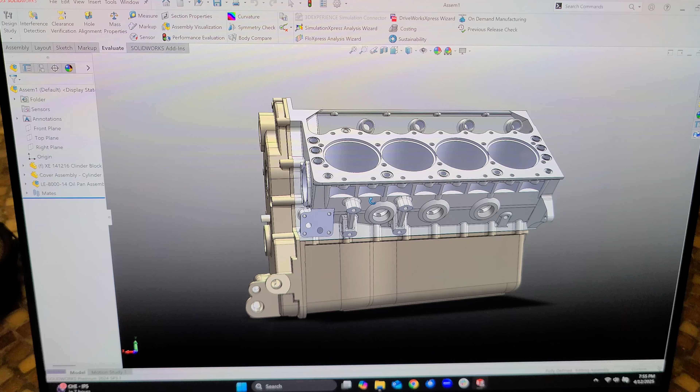Here's the current condition of the Calliope, right? Block as I have it done thus far. Now this is accurate for machining purposes, all the holes, all these angles, faces, and whatnot. There was some mention in Brian Lohnes' video about the copper sealing rings everywhere. I do not have the cylinder liners in here, this is just the block. These are oil drainback passages.

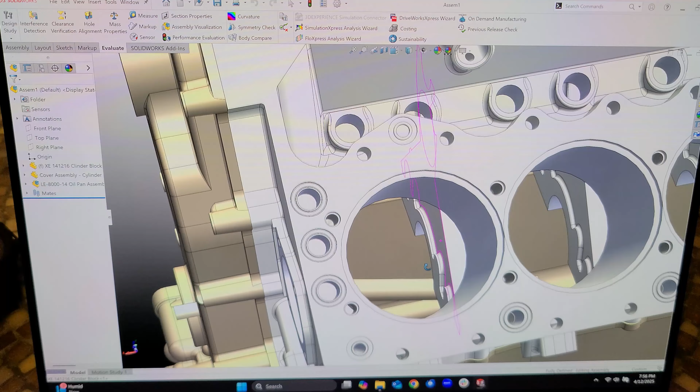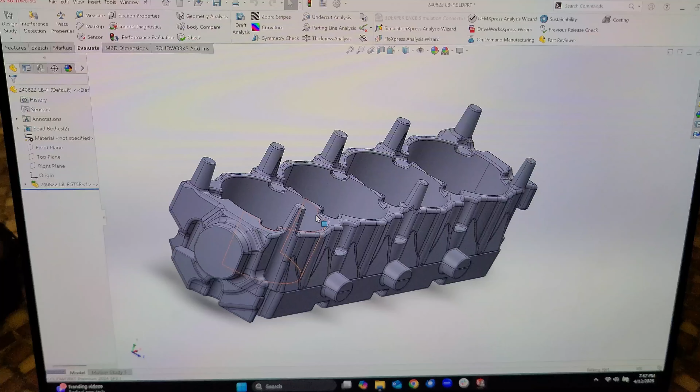Anyways, this is the condition I have the block in right now, and there are no water jackets in here. Now the cool thing is Dan had the water jackets scanned for me, because there really is no good way to draw these things off of the factory Ford drawings. Okay, so here's one of the water jackets right here.

Pretty cool, it's a two-piece deal. This is the core that you would take a sand casting of, and then do the reverse, and then that is essentially this piece, again in sand, and then that would live inside the entire mold, and then this would be broken up, and all the little pieces would come out the freeze plug holes. So that's what that is.

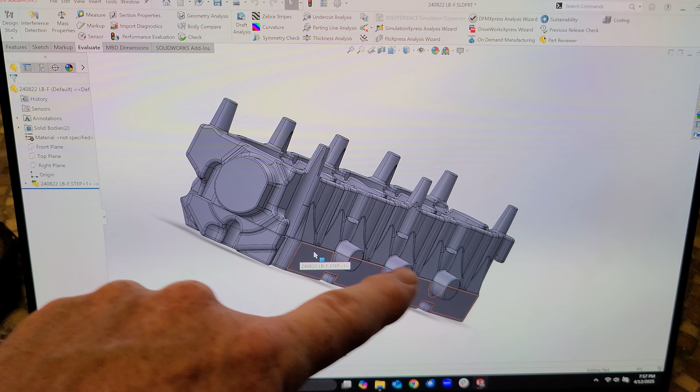This is the outside of the block, freeze plug holes basically. And then this would be an oil passage right here, so this is wall clearance for an oil passage that would feed the lifters. This is the little spud that sticks through and creates the hole for one of the water pumps. This would be the driver's side water jacket core, right?

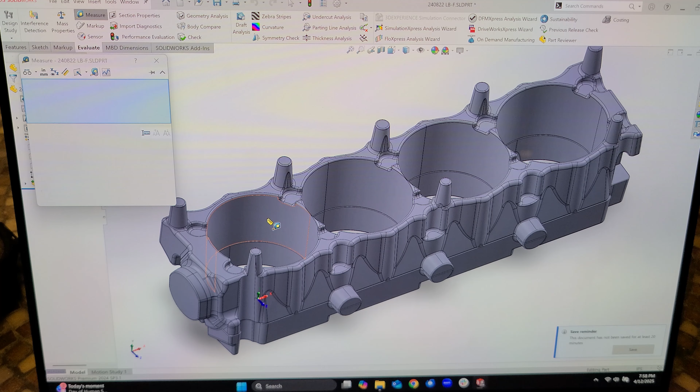Now, if I can do this correctly, let's see. Measure - let's find from the center of that to the center of that bore. Will it do it correctly? Nope, didn't do it correctly. So let's clear the selections, let's do this one more time. Sometimes it likes that line to that line. Nope, kind of pissed off there too.

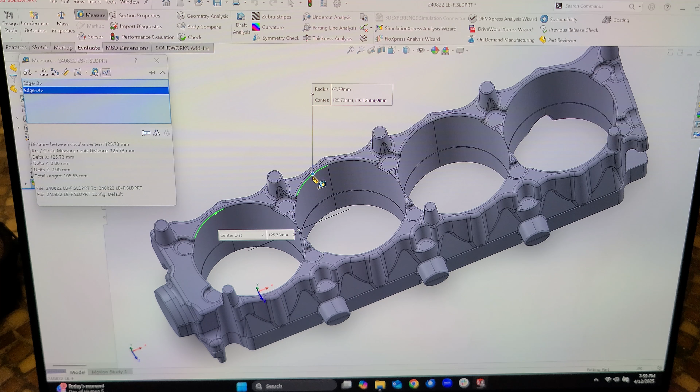Okay, clear selections. Let's try maybe there... to there. There we go. See the black line that shot across there? What is that number? That number is 125.73 millimeters. That's convenient, isn't it?

Let's take that and move that to inches. Okay, and that - we don't want those kind of inches, we want not fractions, but decimals. And let's go 3 places. Okay, go. 4.95 inches from bore center to bore center.

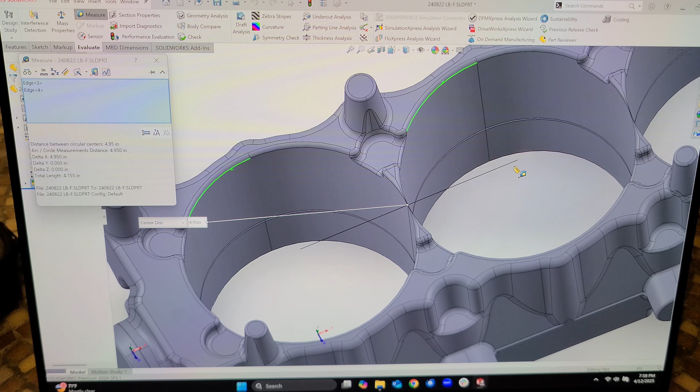Now this is pretty cool when you think about what's going on here. Now, anybody that knows this project and has researched it knows that the Calliope is a 4.9 bore spacing, right? So why is this an accurate scan of the water jacket core? Why is this 4.95 inches? 4.95.

It's got to do with shrinkage. So what I had to do was take these cores and stick them into the block model that I have done already. And my goal was to take these guys and just delete them from the model, right? And when I stuck them in there, I noticed that the bore centers were off.

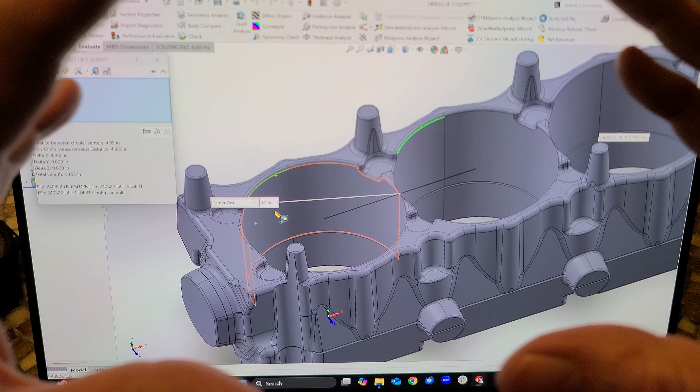If I lined this bore up with the very first bore, and I ran it all the way to the back, it was significantly off, right? 50 thou per hole. So what it is, after conversations with Dan and Dan talking to his guys at the foundry, these things are built with shrinkage predetermined - it's 1.017% bigger in this case, right? Because as this molten aluminum cures, it's going to shrink 5/32 per foot.

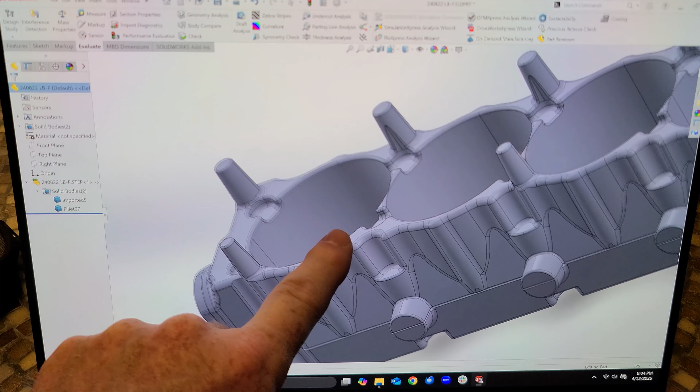So what I did in this case was basically just turn this into a part file instead of a dumb solid body. Basically, this was an imported step file, so I had to turn it into a SolidWorks part file, and then I scaled it 1.017% smaller. And then if we check from bore center to bore center - this is a touchscreen, awesome little computer - it is exactly 4.9. And this was all done when they had these little slide rulers for shrinkage percentage, I think it was described to me. Perhaps somebody can clue us all in on exactly what those little tools are, but that's the way I understood it, and that's where that's all at.

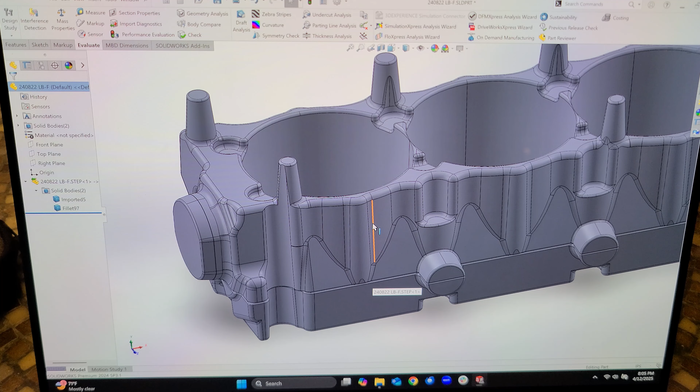Now, this surface out here is very different than what I drew, and this is not very well defined in the drawings. I think what happens is the engineers and the mold makers, the pattern makers - it's kind of like a lost art, right? And there was a standard, the way these things were done.

Of course, there's a bolt hole that goes through here, so they had to leave material for that. But everything else is kind of sculpted away to keep this thing lightweight.

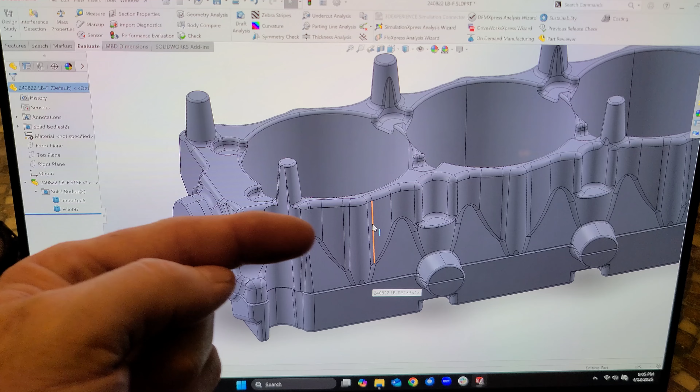It's indicated on the drawings that the wall thickness of all these surfaces is 200 thou. So what I have to do, what I'm working on, is building 200 thou out from all of these surfaces so that I can get all of these little angular surfaces in the side of the block. Is it necessary? Probably not, but I would like to make a nice model.

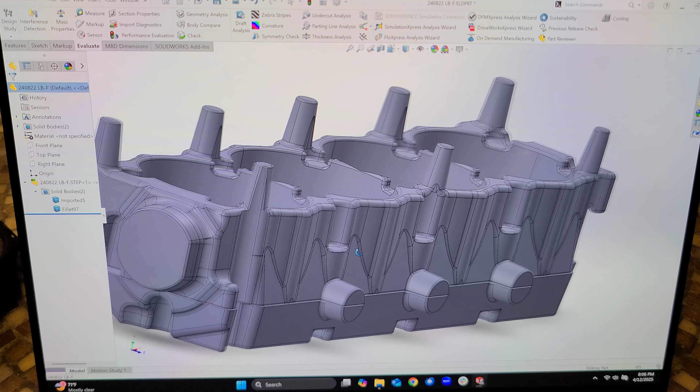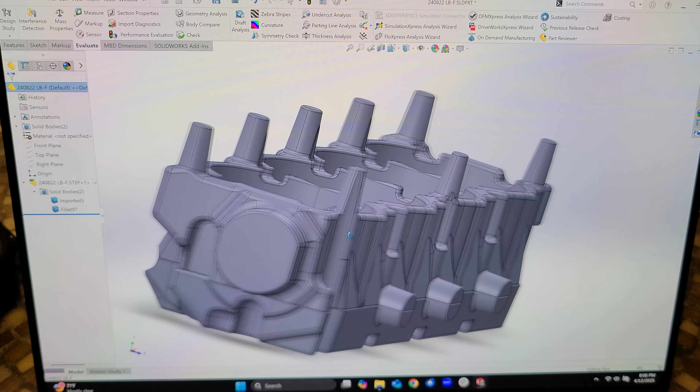You can see where this goes up, and then there's an angle in, and then we have all these little details in here, and this is going to project out 200 thou on the finished part. So I'm going to redraw the whole block starting from these guys, 200 thou out, and then basically project everything up, deck surfaces, and all the areas where we have bolt holes and whatnot. So we're going to start with these and redo the block. But right now we've got a block that we can machine off of, create modern drawings and whatnot. So anyways, that's where we're at with those guys.

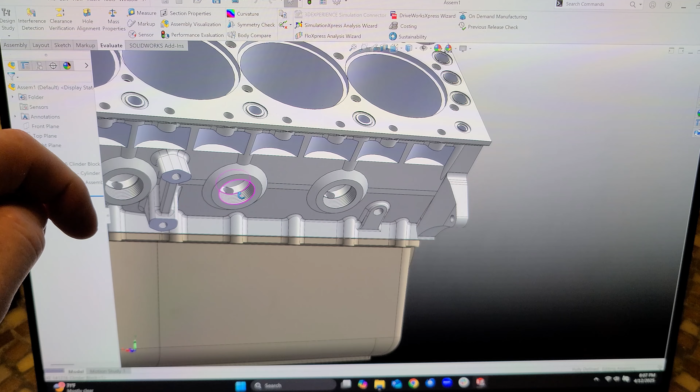I'll give you a look again so you see what I'm talking about. I drew the basics in here, but this still needs a lot of detail in these surfaces out here. Everything else is correct, very close anyways. See this angle right here? This also would have the same angle, but it would be cut away by the machining process for these outer head bolts. So that's not quite perfect, but it's damn close.

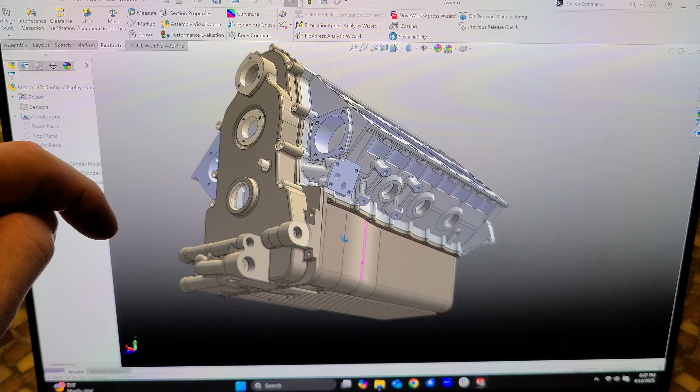And you'll see that I have the oil pan on here, which is finned, super cool. It's not finished yet. We're going to tackle that in another video. What I do have is this.

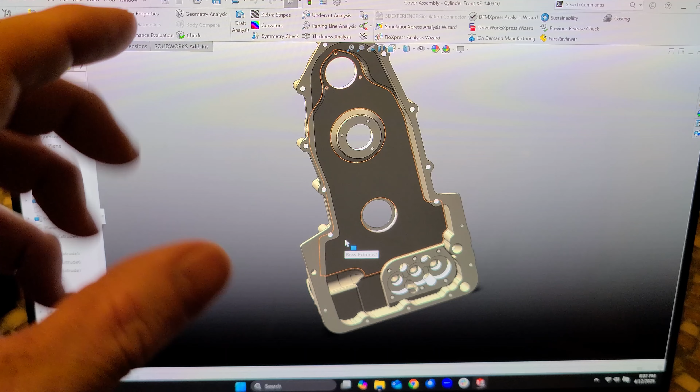It looks like, like I said, Dan hasn't given me all the drawings, so I haven't been able to put this all together and figure out how it exactly works. But it looks to me like there's a chain and a sprocket that runs the center gear of this oil pump assembly up front here. And it's driven off the crank, which is the next big hole up, right? Crank is way up there.

And this is a scavenge pump. There's also a standard oil pump like we would know in a big block Ford or an FE. There's also an oil pump like that. So how it works exactly, I'm not sure. I haven't gone through all the ports and the holes and whatnot to kind of reason my way through this and figure it all out. But that's the gist of it.

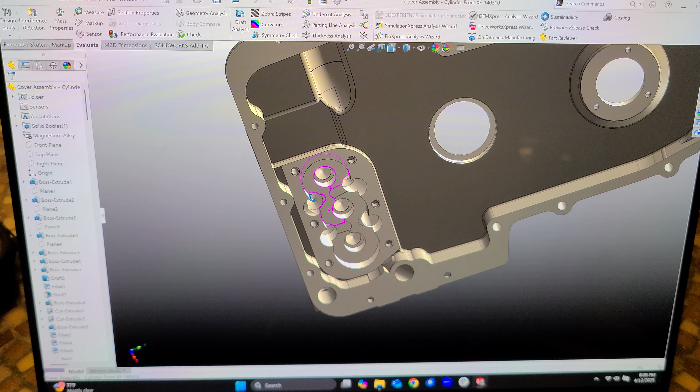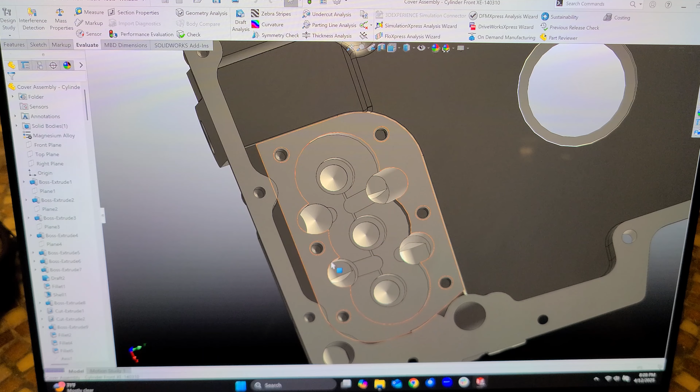So right here, we're back to the model. We've got accurate little bores here. I don't know what goes in there. Again, I don't have the entire model, but whether there's a bushing or bearing, these are going to be gerotor oil pump gears, and we're going to suck and pump oil through these 4 passages, and then the front of the cover.

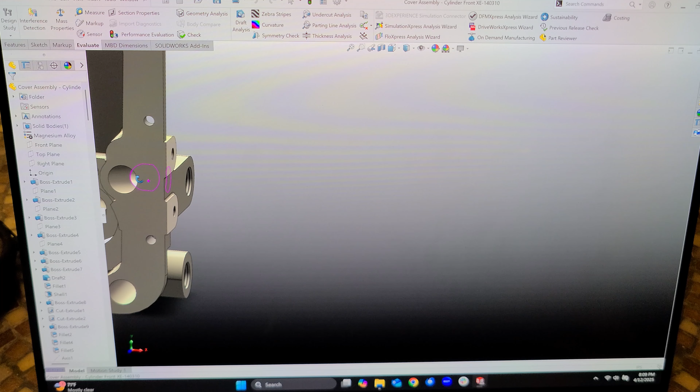We've got some threaded NPT holes for either pushing out or pulling in, whatever it's doing, this scavenge pump system. Not sure what bolts on over here. There's a hole down right through there that runs into the oil pan. So you got 2 pickup tubes in the oil pan, and we'll cover that in another video.

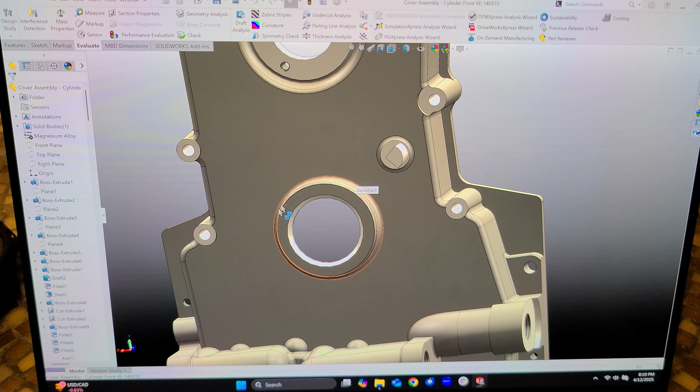But yeah, this is where we're at. Pretty darn cool. This knob up here, yep, you got it right. Harmonic balancer would go up here, and this is your timing pointer. Kind of bizarre, huh?

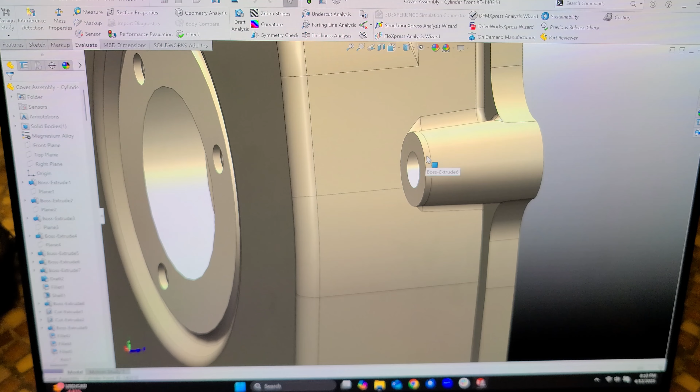Some of these are recessed, machined in, recessed. Some of them are kind of proud, like this. This is how the drawings show it. And then some are quite low, like this. You've got your 2 camshafts up here.

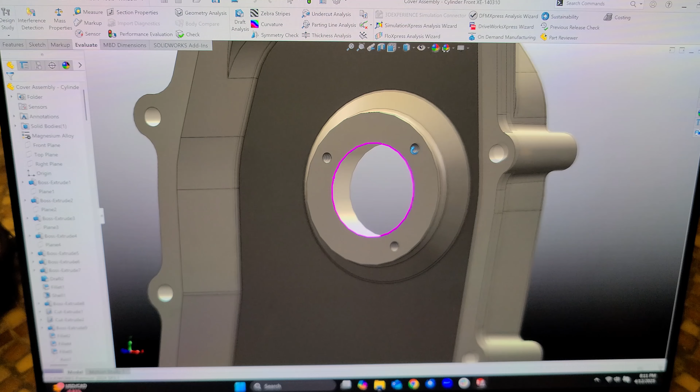I believe this bottom one is a plate that carries a bearing, but I could be wrong. And I believe this one is just a cover up here.

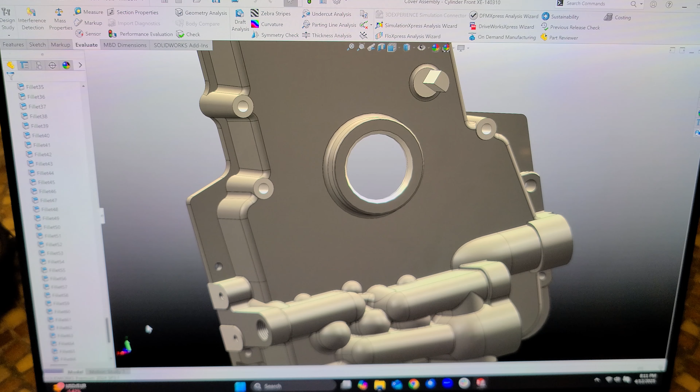But yeah, super cool, front cover is done. This is quite a bit of a feature tree here. The last little bit's really boring, it's just a bunch of fillets, right? Fillet, all fillets, look at that. Crazy fillets. Goes on forever. Anyway, yeah.

So front cover is done. I believe this is a magnesium part, kind of why I gave it a different color. And we can go back, let me look at the computer screen. Boom, and close the part.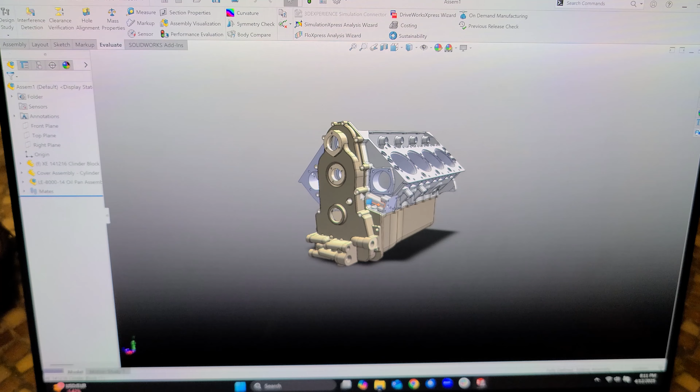Go back, see how it interacts with the oil pan. See the gap in there? They left a gap for the crush of the oil pan gasket.

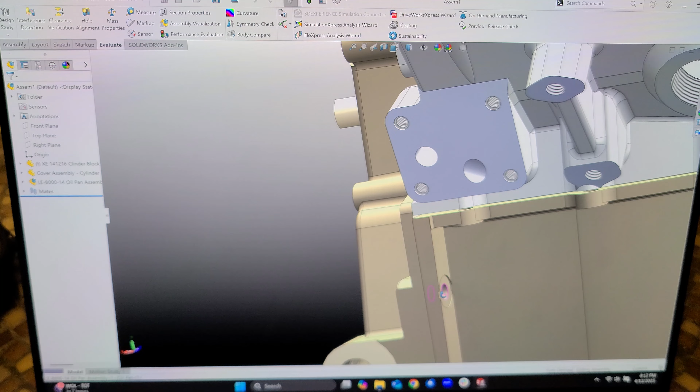And this is a threaded hole, would bolt on from the back side here. I have some cosmetic threads shown here. I don't have them shown here, but that's what it is.

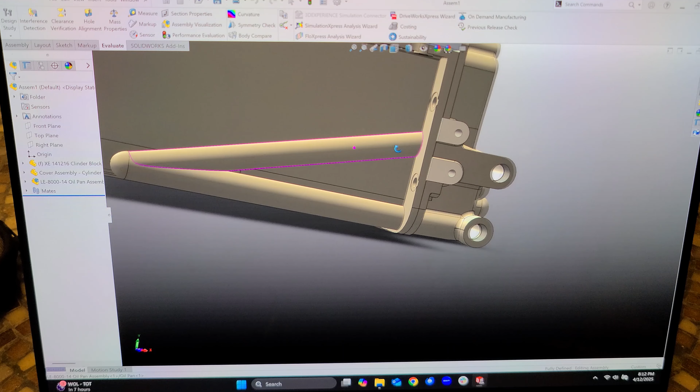Anyways, we're crushing it. Here's those two passages that feed the front cover, the front oil pump. Here's the two oil passages.

And let's see, how can I show this? Maybe I'll take the block and just hide it. Boom, and then we can look at this assembly. So there you go, this is where I'm at.

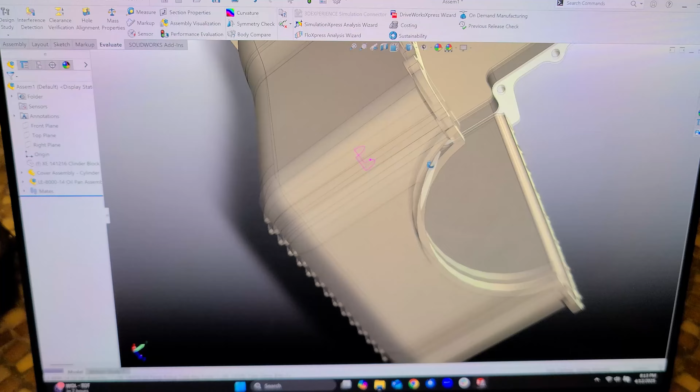I had to redraw, or I had to draw from the original Ford drawings. I've got the front oil pump pickup tube and positioned it with a boss. Got to put a hole in there yet and thread it. But this is the front pickup, I don't have the boss in here.

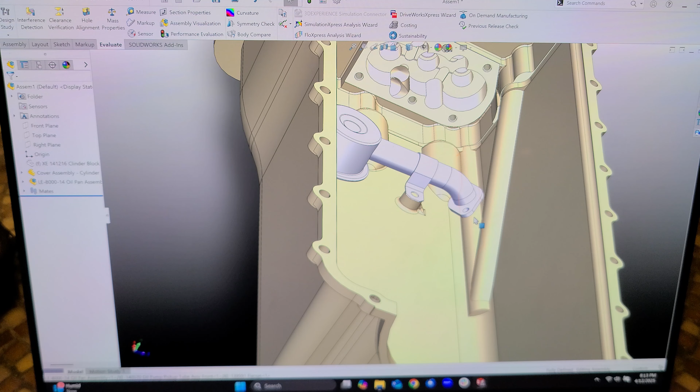I'm using this to create a plane and actually draw the boss for the front pickup, and then I'll knock the hole into the hole that exists in the pan for these two pickup tubes, and of course round this off and make it proper.

But there's also a pickup tube in the back here that kind of ties into the end of this, I think. So I have to draw that now, thinking about what we're going to go through, what Dan's going to go through when he has to build this thing.

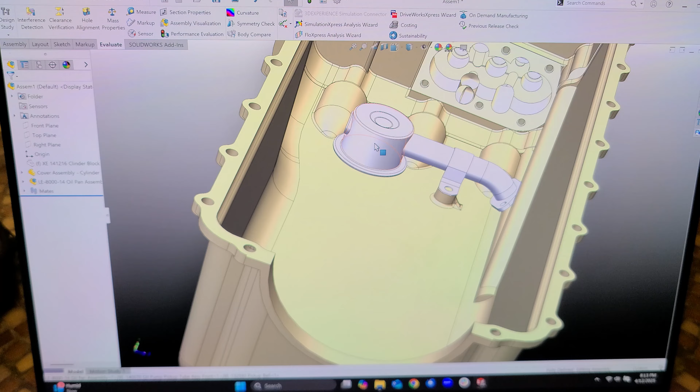Is he going to build this thing according to the way Ford would have done it, with a stamping and like silver soldering, or however this was done back in the day, right? Or is he going to maybe purchase a reproduction part that's very similar, because a lot of these things from Ford are very similar, and then modify it with a custom tube and a little clamp?

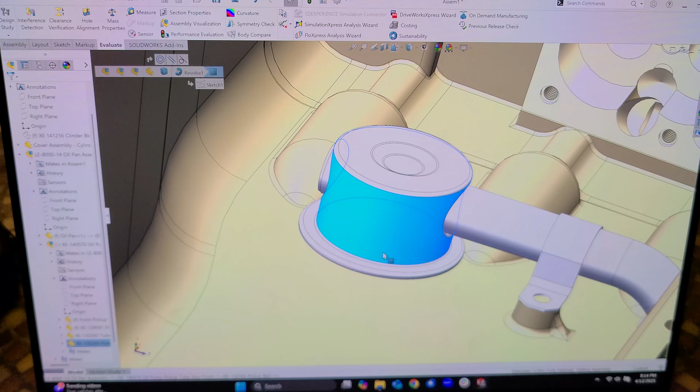I don't know, is all this going to be machined out of billet? Don't know. That's going to be something that as things go into production, we're going to have to figure out the best way, most effective, most cost effective way to make this stuff.

But these are the challenges. Like, this stuff doesn't exist, right? So it's all got to be handmade.

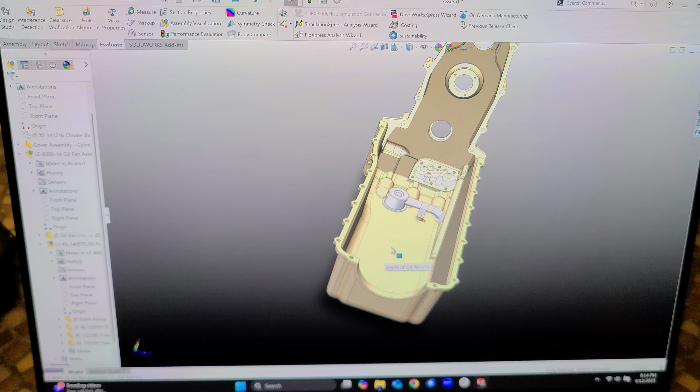So yeah, still got some work to do back here. Rear pickup, and then the oil pan will be all but finished. And then what I move on from there is valve covers. Dan identified the need for a model for the valve covers.

So that's where we're at. We can show the engine block again. There we go. So yeah, that's what I'm working on.

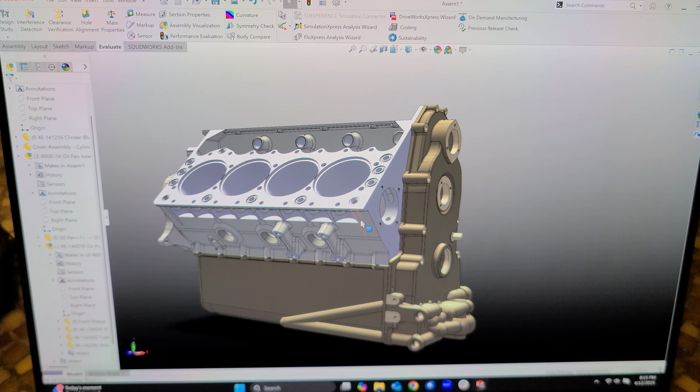So yeah, this will be a much different video than the long 30-40 minute one where we went into the history of the Calliope engine. Notice I actually do know how to pronounce it. This one's just showing where we're at. The project is still moving forward.

Casting the block is a big deal. Dan has told me that he's purchased a 3D printer that he would be able to print life size, 1-to-1, the block, all of this engine stuff. Pretty cool stuff.

Project's moving forward. It's a pretty cool project, and I'm really happy to be a part of it. Hope I can help out in any way I can to make this process easier.

Nothing in it for me other than just being able to pore over these drawings. My wife helped me, like I explained in the other video. Each one of these drawings is like 17 feet long, it's 1-to-1, and they have several views and sections all broke out 1-to-1. It's a massive drawing, and what Dan was given was scans, sectional scans of that.

So my wife, being the marketing professional and the Adobe person - I don't do it, Photoshop, InDesign, all that stuff kicks my butt - I asked her to help me stitch all this stuff together, even out its contrast, and make one single picture for the block. So when I was doing it, I didn't have to go through 7 different files to find the information I needed. It was just one file.